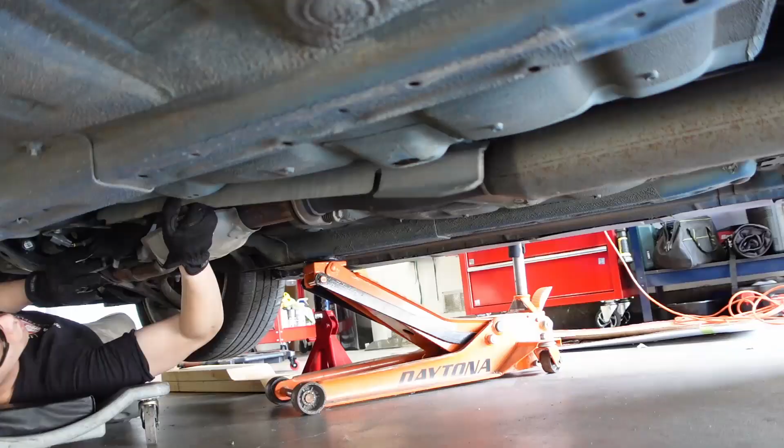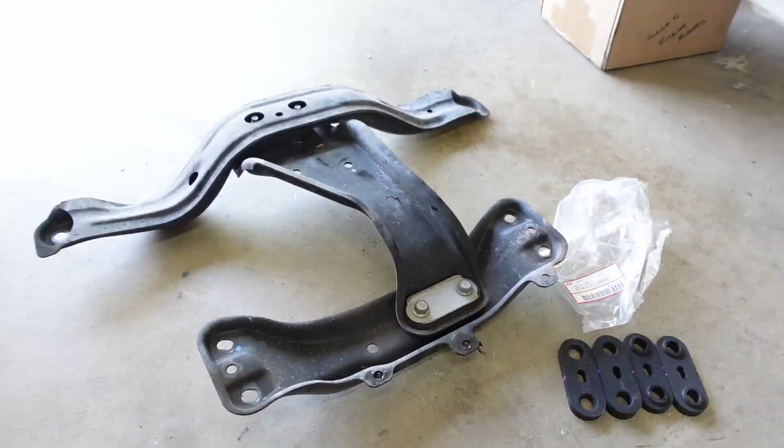Now with the transmission crossmember off, I also decided that this was a good opportunity to replace some of these bushings on the crossmember with this STi Group N. I think they call it a positive shift kit. I have a whole set of Group N bushings that I'm gonna put on the car as well, but it's a good opportunity since it's already off to go ahead and do that.

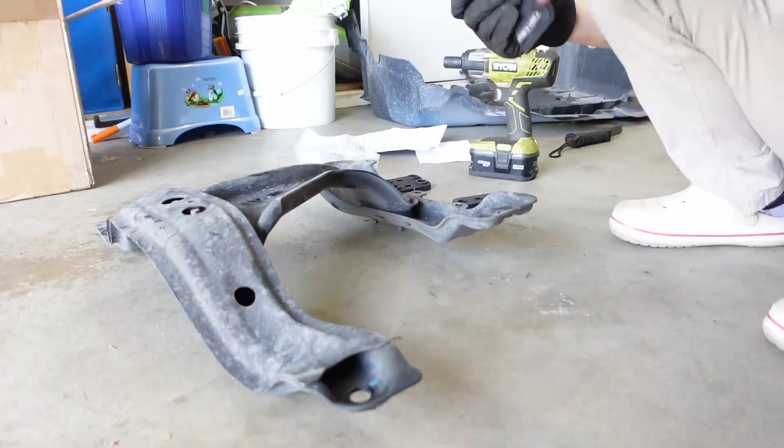So we are gonna remove, I believe the bushings are here and here. There are two for each side. So we'll go ahead and do that right now. Cool, that was easy. We only finger tightened every bolt because when we get it on to the car, I want a little bit of play to make sure all the holes line up, and then we'll torque it on the car.

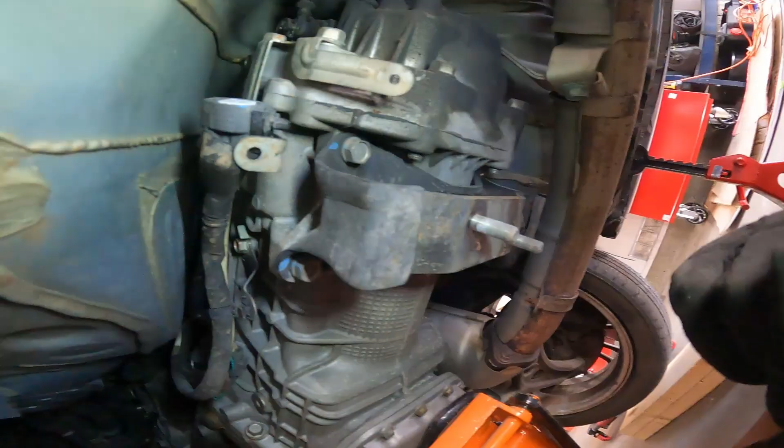And also while we're down here, I'm gonna replace this OEM transmission mount with a Group N transmission mount. And man, you can see I can already move this transmission mount with just my hand. There's 4 bolts total. We got 1, 2, and then 2 more on the other side. So let's go ahead and yank that out and put that in.

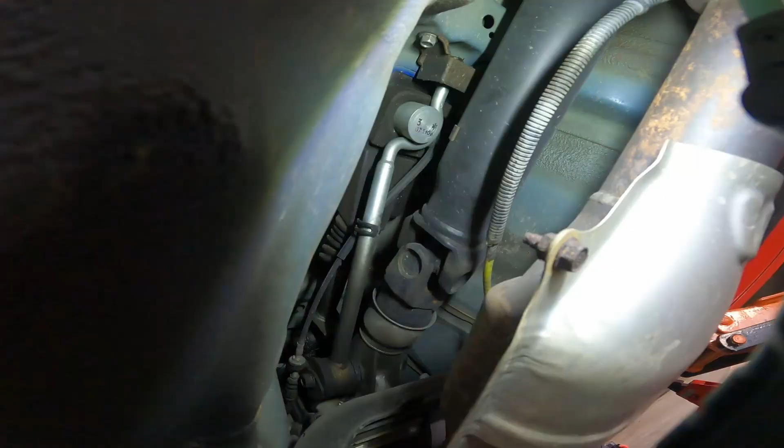You can also see from under the car, this is going to be all the shifter bushings that we are going to take care of. Here is the rear shifter mount. I don't know what it's technically called, but that's going to get replaced. You can see our shift lever. Those are the 2 bushings right here that we're also going to replace.

And then I don't know if you can see from here, but right about there is this kind of U-joint that's going to have to come out as well. So yeah, it looks simple from down here, but it's my first time doing it, so I'm probably going to have some fun doing this.

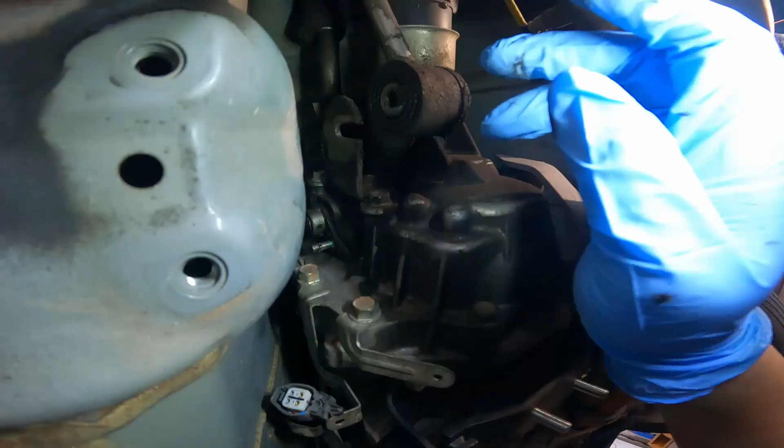All right, so I want to show you how you can get this linkage part out. This is the reverse cable right here, and it's connected to a pin here. There's a little cotter pin that you just pull out with some pliers and slide that right off. And then there's this bolt right here that goes through the bushing. You won't be able to get it all the way out because it's going to hit the side of the tunnel, but you can see that there is a little slot right there.

So once you loosen it up, you can pull it down and then you'll be able to take this bolt all the way off. So the only thing left now is to pry off this old bushing right here. You can see it's pretty pliable, so it should be pretty easy to get off, and then we'll get our new bushings in.

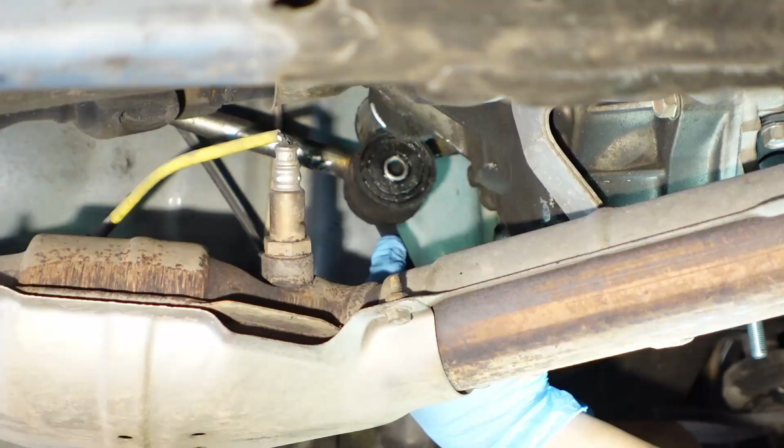Wow, what a freaking mess. I swear to you, I spent probably like 2 hours trying to get this U-joint out. Struggled hard, it was really difficult to find any instruction or video that explained well how to do it. But I'm gonna show you guys how to do it, so hopefully you won't have to struggle like I did. All right, so how did I do it?

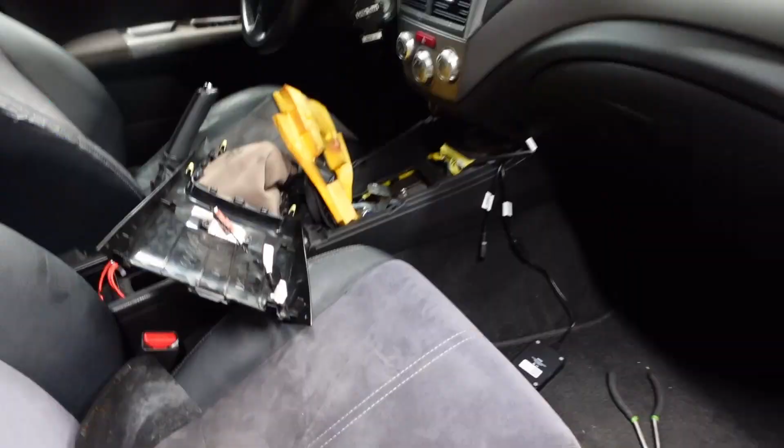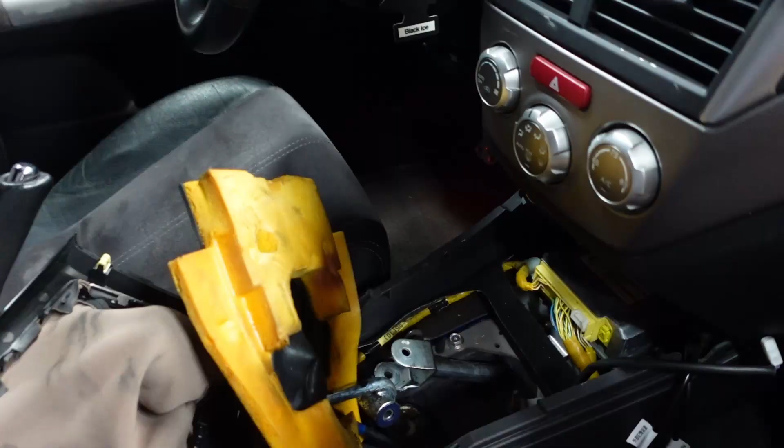Well, step 1, tear apart your entire interior to get to the shifter U-joint right here. I'm not gonna really show you how to do it because I didn't record it, but I have a video where I installed my radio. There's also other YouTube videos where you can learn how to take away the interior. But basically 2 bolts in here, unscrew those, then this kind of just pops out with some leverage, and then there is a screw right there that you'll need to remove.

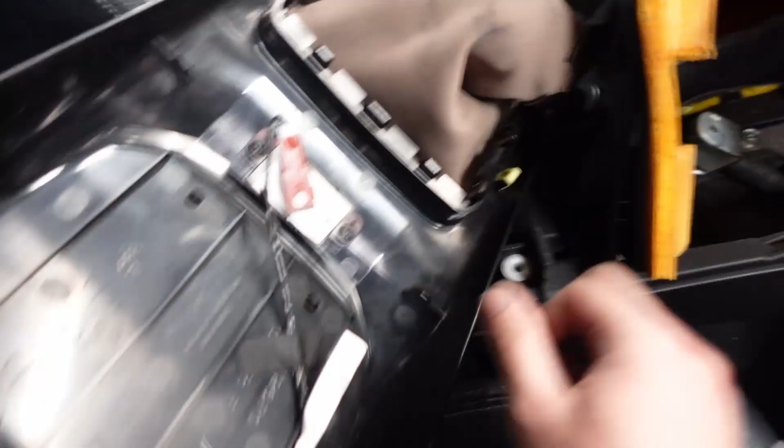Also, there'll be some of these plastic white clips right here that you'll just need to turn slightly and then pop off. But once that's all removed, then we can get rid of this foam, and then this right here will be connected to your shifter, and just unbolt that.

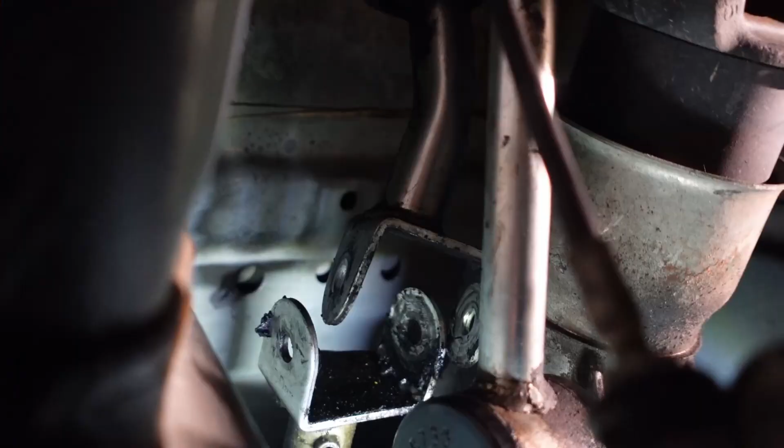The reason why is so that we can then turn it to get some leverage on a certain bolt that connects the U-joint down at the transmission side. So let's hop down there and I'll show you what I mean. All right, I apologize. It is super tight down here, but I'm gonna do my best.

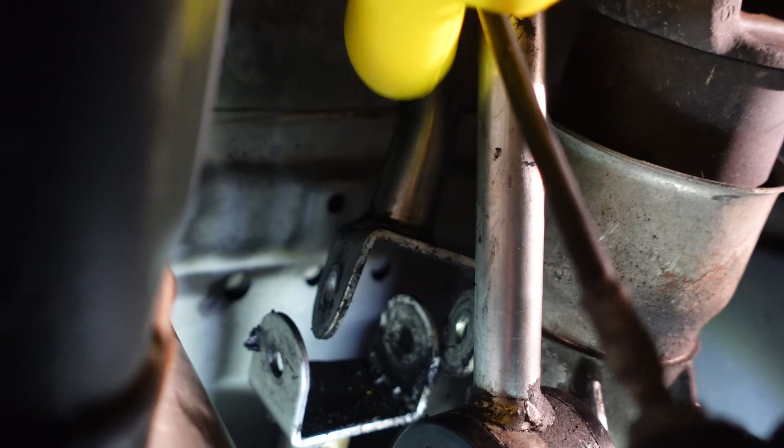So you can see right there, that is the U-joint that connects from the shifter to the transmission. And basically by loosening it up on the top, we are able to then rotate this lever arm right here so that we can get vice grips on it and then remove a bolt. Again, I'm going to go over what I mean in just a sec.

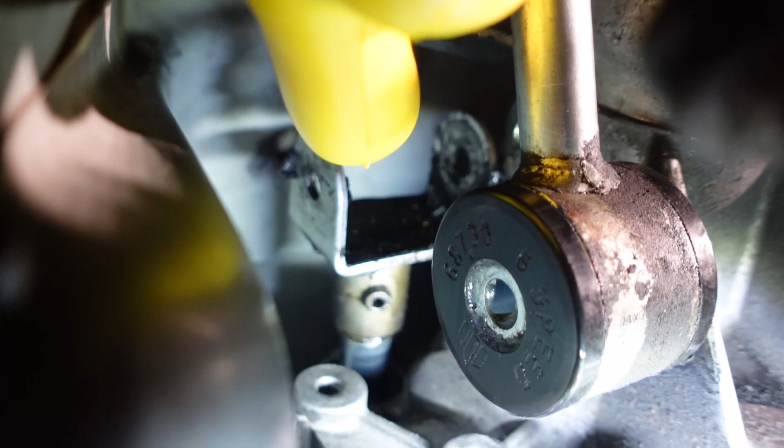And also there's going to be a bolt right here on the side of this U-joint, and you're going to be able to get it out, but then you're going to run into the side of this transmission tunnel. A lot of people, they would punch out that pin, but I opted out because I just didn't have the right tools. So instead what I did was I took away the jack that was supporting the transmission, and basically now it's being held on by the drive shaft and the engine.

All right, so what I did was I took a pry bar and I basically put it between the tunnel and the transmission. Make sure you're not catching it on anything that could break, and gave it a really good push. It's going to take some elbow grease, but you will be able to push the transmission enough to the side to just wiggle that bolt out.

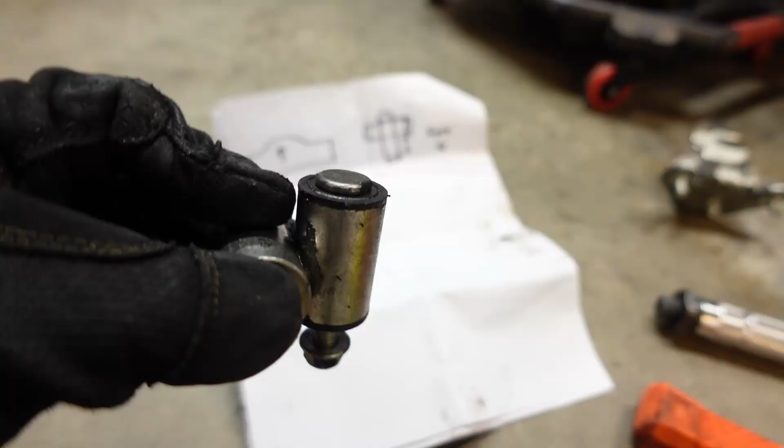Now the way this U-joint is oriented is this stupid design, where this flat bolt head here is going to be facing towards the top of the car, and this nut is going to be facing below you. Now obviously when you try to take off this nut, this bolt is just going to keep free spinning.

Now the reason why we undid that shifter fork linkage from the top and from the bottom is so that we can then turn that rod this way. Now we have better access to this head, and you get a nice meaty pair of vice grips, and you grip that head, and then you'll be able to take this nut off.

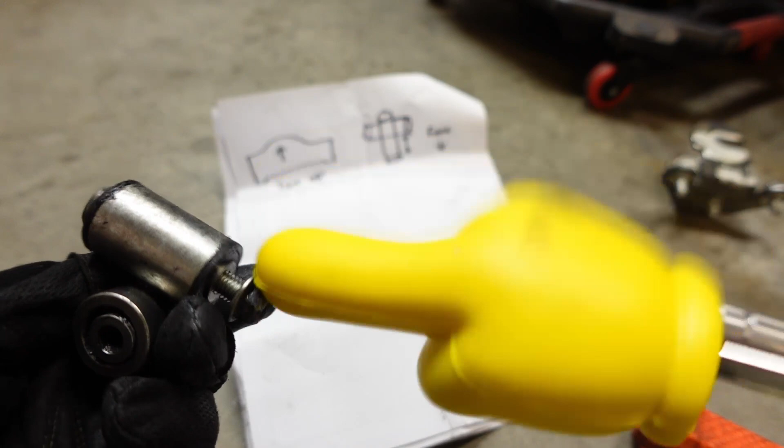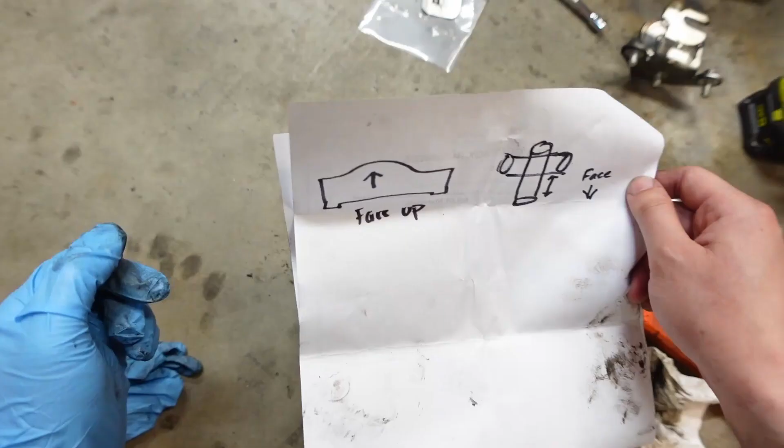Now I want to also tell you that there is a specific orientation as to how this U-joint is set in the car. There's going to be two of these U-joints. One is attached to the transmission. That is going to be oriented with this little hump, and you'll notice it on the U-joint. There'll be this little hump that faces up towards the car. That is the U-joint that is connected to the transmission.

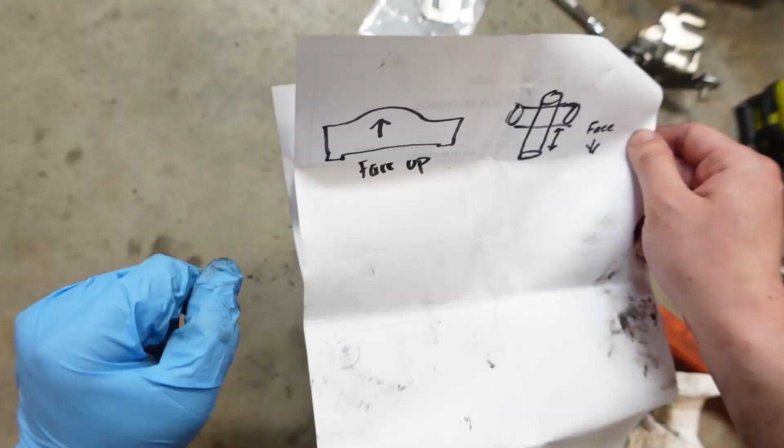There is another U-joint obviously that is connected to the shift lever that we pulled off. That is going to be oriented with the hump facing the driver's side, so to the left. So keep that in mind.

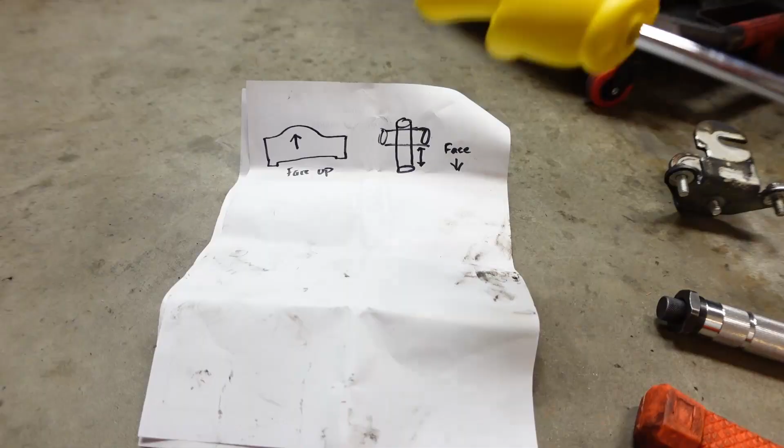As for this bushing piece, you'll notice that it's not quite symmetrical, right? You can see how it's a little bit longer on the bottom and a little bit shorter on the top, where it kind of meets this horizontal piece. And the way that's oriented is that longer side is going to be facing down. So remember that when you put it back in, because that will be important.

Now this piece is where we're going to be replacing those bushings. As you can see, these two bushings, they're okay, but if you look at this part, see how it just falls off, that sleeve?

Well, that's pretty much how it came. There was absolutely no bushing left, and it was just this metal sleeve inside. So that's probably where all that sloppy, floppy shift was coming from. And let's keep going with this install.

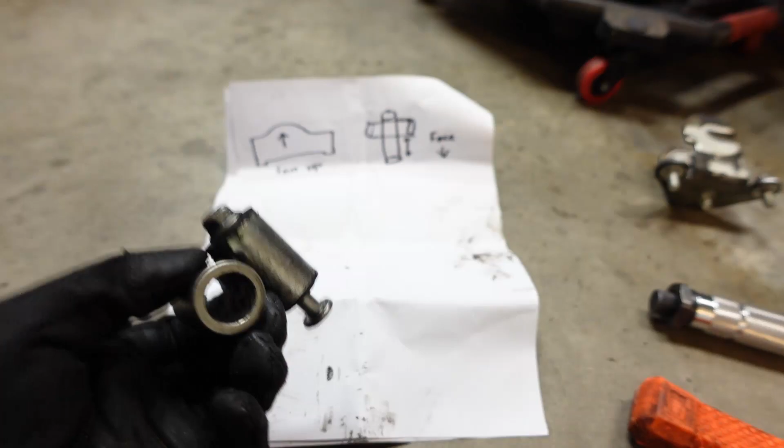I also replaced this rear shifter bushing with a Whiteline piece. It's really tight up there, so I couldn't really get you a good view, but it is pretty obvious how to do it. It's towards the back of the linkage. You'll just kind of see it popping right there. Pretty easy access to get. Just pop out those two bolts, install the new one, but we also replaced that in the car, and that's already in there right now.

All right, so we got all the bushings installed, all the linkages hooked back up underneath the car. We just got to get the transmission cross member back up, torque it down to spec, and then we can move on to the interior to get the short shifter adapter installed.

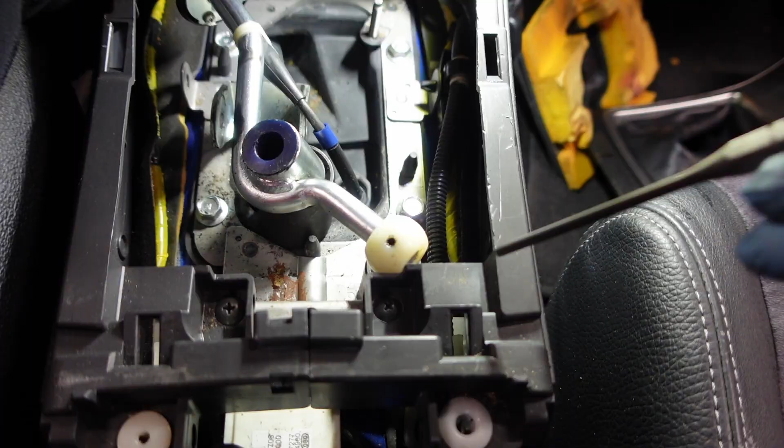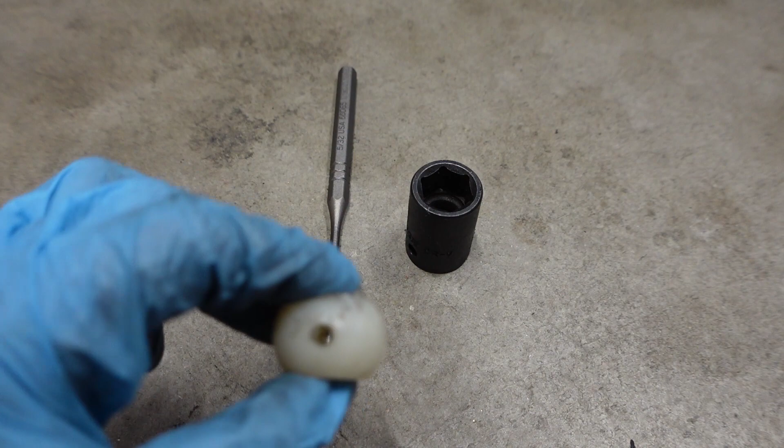Holy hell, that was a lot more annoying than it had any right being. So this ball end on the OEM shifter rod is super annoying to get out. You can see there's a hole there and it's held on by this little roll pin. Basically, the first thing you want to do is try to get it as flat as possible on a flat surface.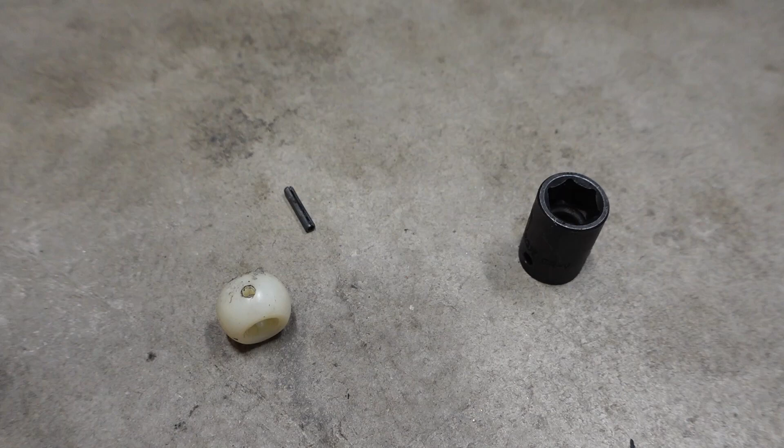I did it while it was still kind of attached to the car, but you have to line it up nice and perfect and really give it one hard smack. Then once the roll pin's kind of halfway out, I got a 17mm socket, lined it up like that, punched it, and that gives you enough room below to let the pin fall out.

All right, so I got the shifter back in, and right now I'm just test fitting it and trying to see what throw length I want. Right now I have it set at pretty much the longest length, which means it'll be the shortest shift. I'm actually pretty happy with where it's at.

I like how the shifter has been raised, so the shift knob's a little bit higher. Makes it feel a little bit more race car-y. And the shifts being shorter, I'd say probably about half, it feels great. So this is kind of where I think I want to keep it.

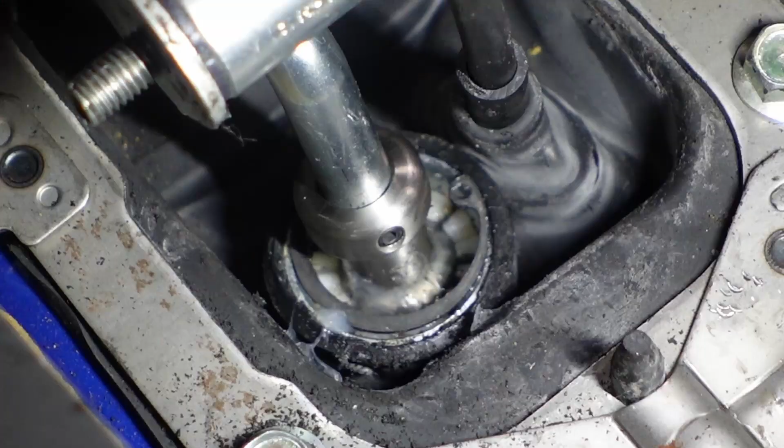So I'm going to get everything buttoned back up, put all the screws in, tighten them down to spec and everything like that. And then I'm going to add Loctite to the set screws to pretty much lock where my shift points are right now.

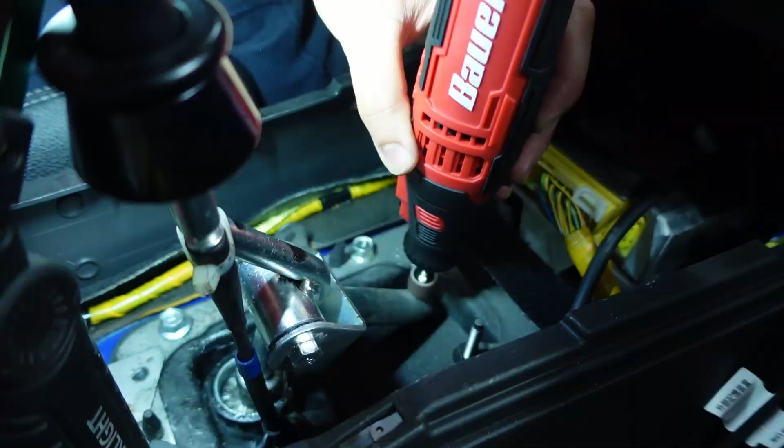And we're also going to have to do a slight modification to the metal surround trim, because since everything's raised up, the shift fork, shift U-joint or whatever might interfere. So we're just going to make a little bit of room. All right, let's go for a quick test drive.

All right, overall initial thoughts, the shifts are much, much tighter, and I love this. It's solid. There is no more play like we had before. It takes a little getting used to because the shifts are so short now. You got to make sure you put enough force that it gets into gear. It's not bad overall. It's just different from the floppy shifter that I had before.

But overall, I'm super happy, especially with the bushings. I love the overall shifter height now. The shift throw, again, great. Super, super happy with this.

All right, so it was a major pain to get all the shifter bushings in there and to get the short shift adapter in, but wow, what a complete transformation it makes driving this car. You remember all of that slop that I had before. Gone. The car is completely different to drive. Super happy with how it all turned out, and at the end of the day, we were able to get through it.